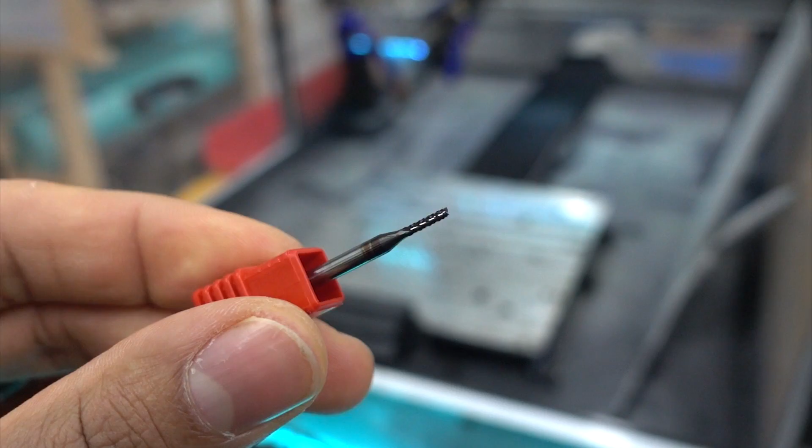Today we're making custom top plates for our magnetic case wallet, as well as engraving a custom pattern on the front plate with a 1/16 inch CVD diamond coated end mill. Let's get started in Fusion.

Okay, the next part we're going to be making for our case wallet is this top plate here, which your cards and cash go under. It's held together with these two binding posts. And to cut this out, we're going to be using three different operations.

We're going to be using 2D Pocket to cut out these small features in here. We're going to be using drill bore to cut out the holes for the binding posts. And we're going to be using 2D Contour to cut out the outer edges, as well as put on the chamfer on the outside, as well as in this 2D Pocket. So we're going to move up here to our palette.

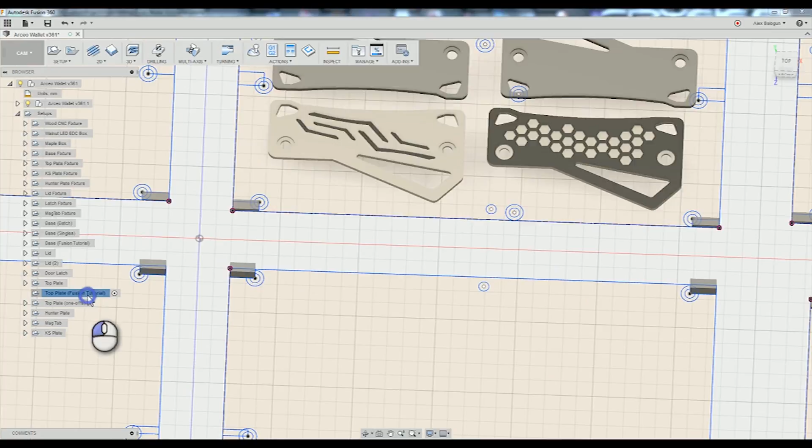So these two plates are what we're going to be doing the CAM for today. These patterns were just overlaid on top of the existing plate. So to get these patterns on, I didn't use Fusion. You can use any other vector program. I use Illustrator specifically. You can upload any type of DXF or SolidWorks file,

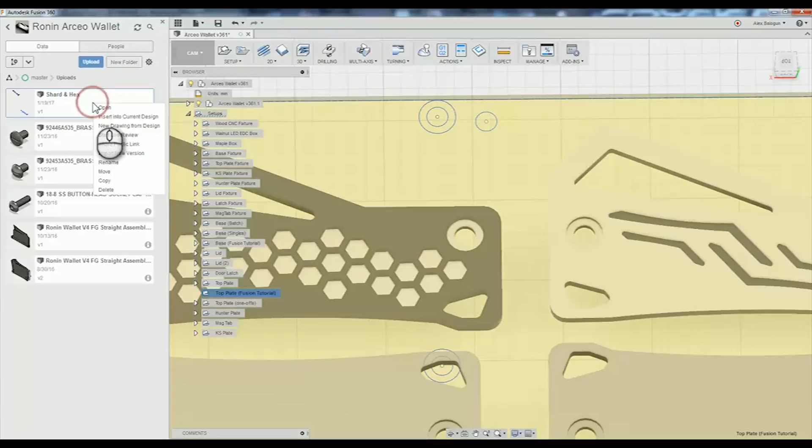and once it's uploaded, you just right click and you can insert into current design, and that will overlay the sketch of the file you uploaded, and you can position that sketch and align it with the geometry of the plate or whatever you want to do the engraving on. So that's how I got these patterns into Fusion.

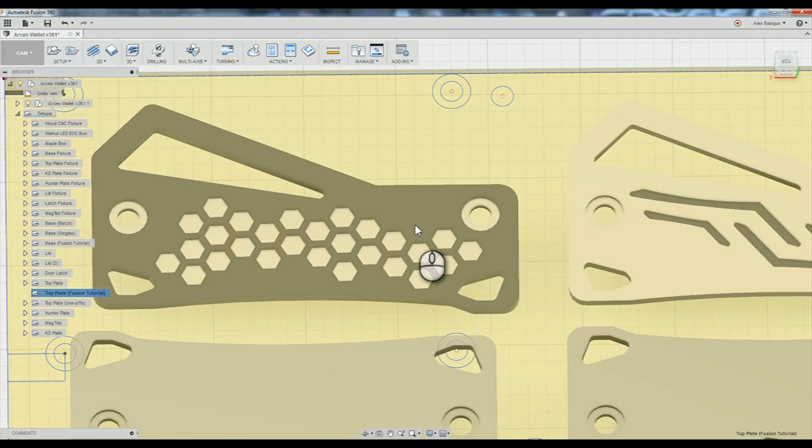Okay, so we have two different patterns we're going to be engraving first. The one on the left, I'll call the hex, and the one on the right, I'll call the shard. They're both going to be using 2D Pocket with a 1/16 inch tool. So let's get started and select the setup. We're going to go to 2D Pocket, and our tool selection is going to be this 1/16 inch CVD diamond coated end mill.

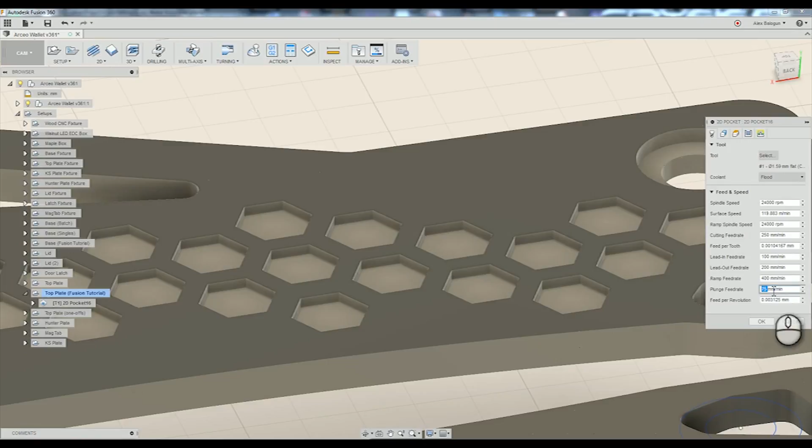Because the depth here is about 1 millimeter, which is a significant fraction of the tool diameter, we're going to go pretty easy on the cutting feed rate. So our cutting feed rate, 250 millimeters per minute. Our lead in 100, lead out 200, and our ramp, because in 2D Pockets you're going to use a helix to bore into the material, your ramp is what will determine your entry into the material rather than your plunge. So your plunge rate is fairly superfluous in this operation.

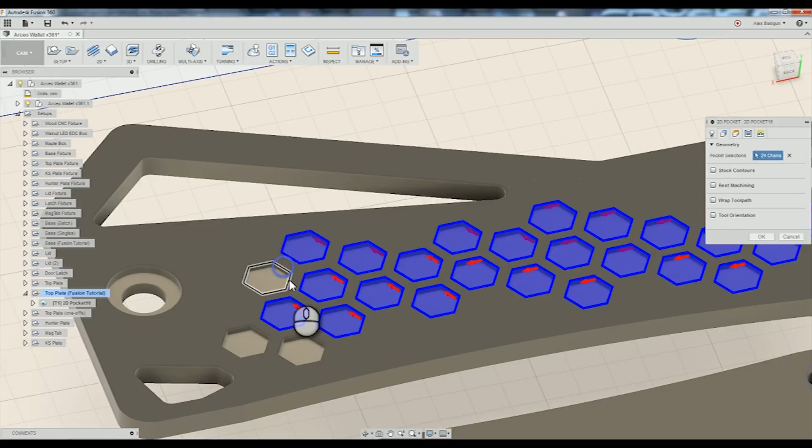So now we're going to start selecting our geometry. We're going to select just the top contours in each one of these hexes. And you'll notice that the red arrow is on the inside of these hexes, so the pocket is bounded on the outside by the blue line.

So now we're going to click over to our heights tab, and we're going to set our clearance height 10 millimeters above our retract height. That's fine. Our retract height, we want this to be pretty shallow because there's a lot of hexes and we don't want to waste a lot of time in Z-axis movement, so I'll reduce that to 3 millimeters. Our feed height can be nice and low, 1 millimeter. Our top height will just be our stock top.

And our bottom height, I like having this at stock top, and then I put in a negative offset. So because I know that I want about a 1 millimeter depth into the face of the material, I'm going to put a -1 here.

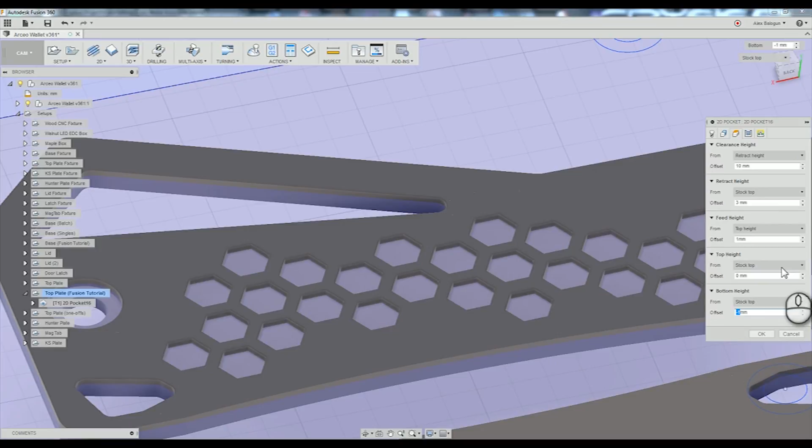Next is our passes tab. So our maximum step over, I want this to be about half the diameter of the end mill, just to keep it nice and safe so we don't get any tool breaks. So I'm going to put in 0.8 millimeters for the maximum step over, and I don't need to mess with the stock to leave. The model is pretty much fine the way it is. I'm also going to turn on smoothing. That'll reduce some of our G-code overhead.

Next is our linking tab. We're going to set some really nice, small, shallow lead-ins because the features are so small. So we're going to put in 0.2 millimeters for our lead-in, as well as 0.2 millimeters for our linear lead-in distance.

Now our helix, we want our ramp diameter to be fairly small, so 1.5 millimeters works. That'll give us a nice small helix that won't impact the outside edge. And the ramp clearance height, we can reduce this to 0.5 millimeters.

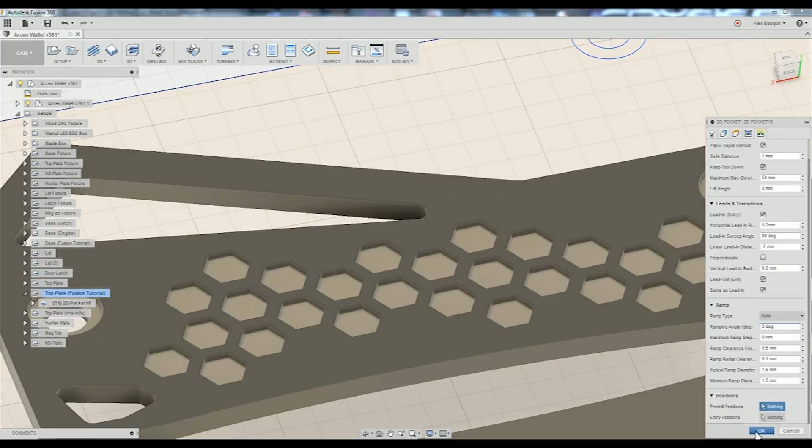And our ramp radial clearance, just to make sure we're not impacting that outer edge, put that to 0.1. And we'll increase our ramp angle a little bit to 3 degrees. Okay, we're going to hit OK and generate that.

Okay, so this is our toolpath here. So we're starting off by boring right into the center, and then it moves over in 0.8 millimeter increments. Now that we have a good look at these toolpaths here, I'll also explain a little bit why I chose 2D Pocket instead of something like Adaptive.

So the great thing about Fusion, especially if you're new to CAM, is when you hover over the toolpath or the operation type, it will give you a nice little tooltip that explains it. So here in 2D Pocket it says it creates a roughing operation that uses toolpaths parallel to selected geometry.

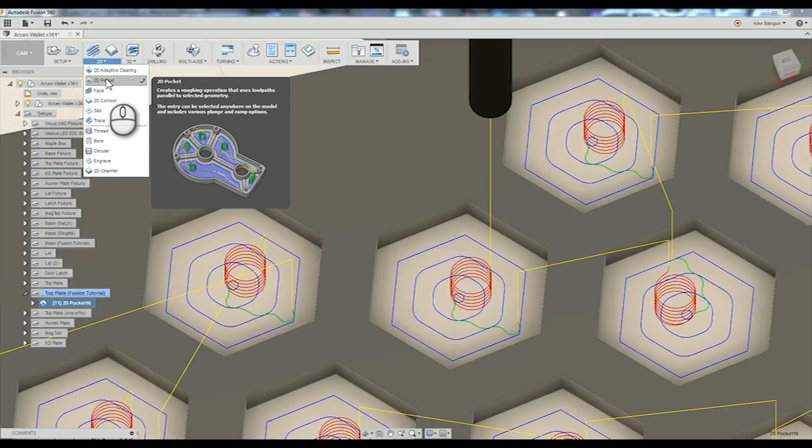So because this geometry is already in the shape of a hexagon, that means my entire toolpath will follow that entire contour and just keep doing step overs until it reaches the outside. So this is really a roughing and finishing strategy in one, depending on your cutting speed. Whereas if you use a 2D adaptive or a 3D adaptive,

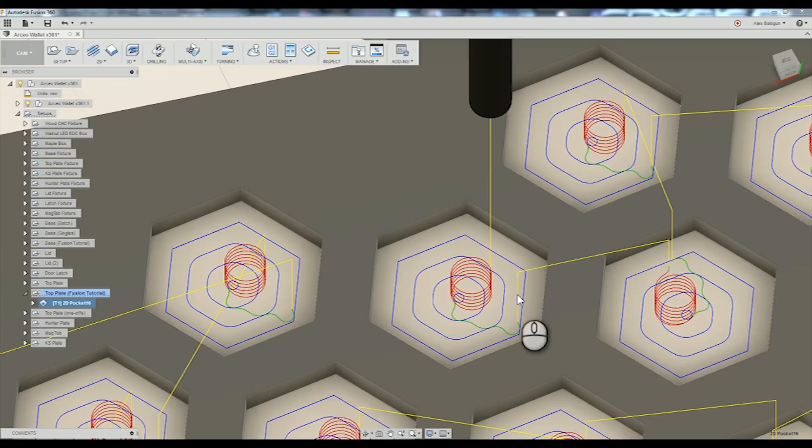the CAM will want to create trochoidal milling paths, which if you have a machine that isn't very rigid, or if you don't have a commercial CNC machine like I do, you're not going to want to mess with extra finishing passes and extra roughing passes when it's not really necessary.

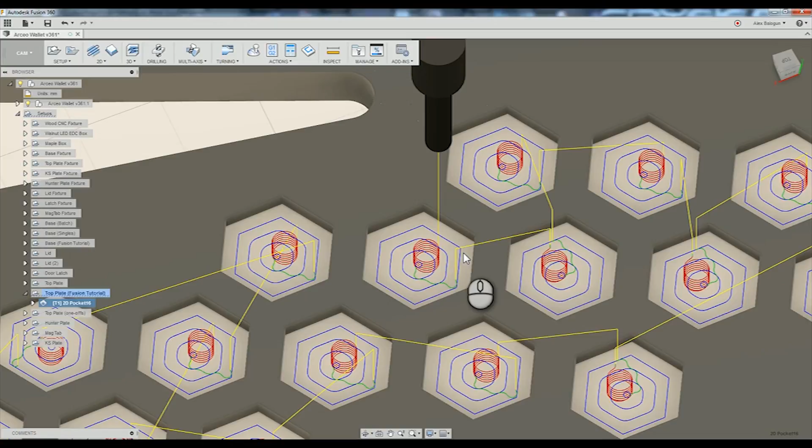So by using 2D Pocket, it will be a little bit slower than a trochoidal milling path, but you'll get a very nice sharp cut on the outside when the operation is finished. Okay, for our next operation, we're going to be doing a 2D Pocket to cut out these small features in here for the shard plate.

Now there's a trick in Fusion that you can use to quickly duplicate a toolpath that you know is going to be fairly similar to the one you previously did, instead of starting from scratch again. So I'm going to right click on the operation we just did, go down and hit duplicate, and that will make a second copy of that same toolpath that we can go in and edit now. So all of our cutting speeds and feeds are the same.

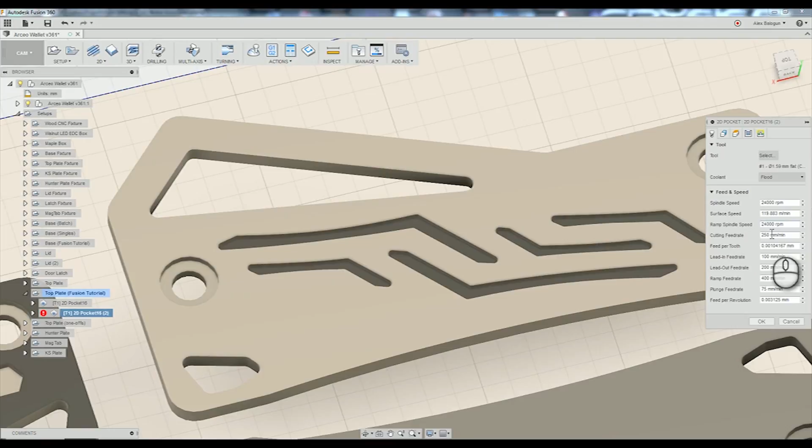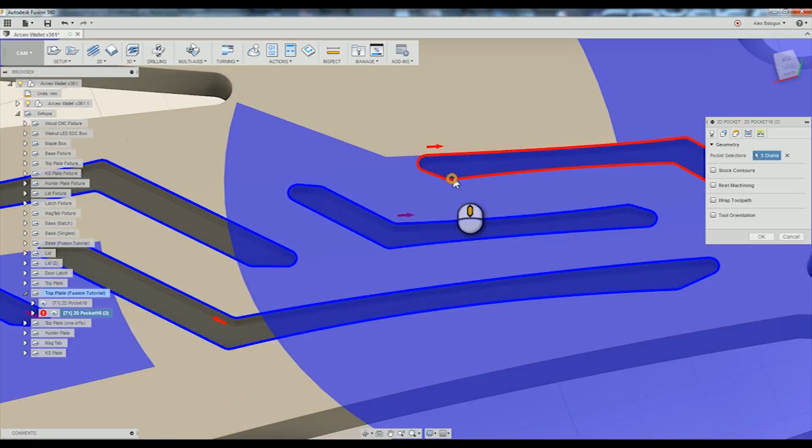I'm going to move over to the Geometry tab and just clear all of those pockets from before and start selecting our new geometry. So I'm just clicking the top of the contour at the top of the stock in each pocket. Because we want to make sure we're doing the inside, I'm going to click these red arrows and make sure everything is on the inside.

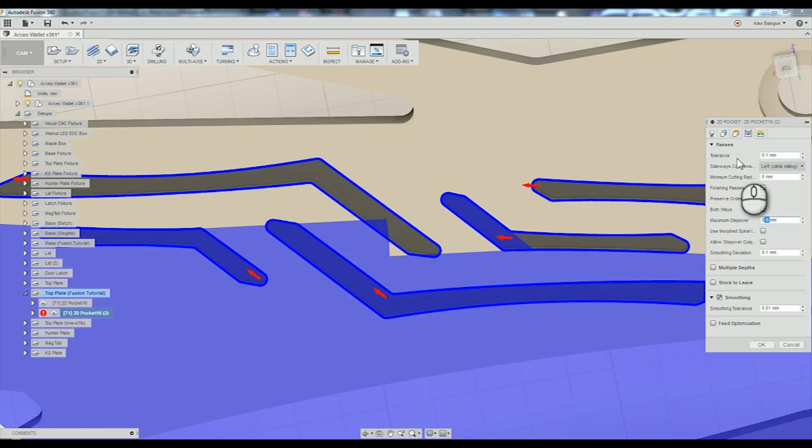Now in our passes tab, everything is basically the same. We're still going to want that 0.8 millimeter step over. Now in our linking tab, we're going to want our entry helix to be a little bit smaller because these features are quite thin. So in helical ramp diameter, we're going to change that to 0.5 millimeters. So that's just going to basically make this the absolute minimum diameter helix we can do for our entry into the material.

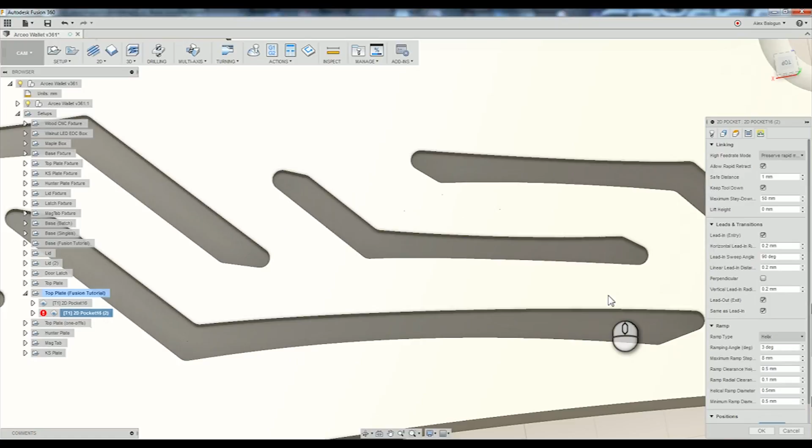Now we're going to go back to our passes tab and we're going to set some stock to leave here. Set our axial stock to leave to 0 and set our radial stock to leave to negative 0.3, just to make sure that because these features are so thin, we're getting enough space. We're also going to turn on feed optimization.

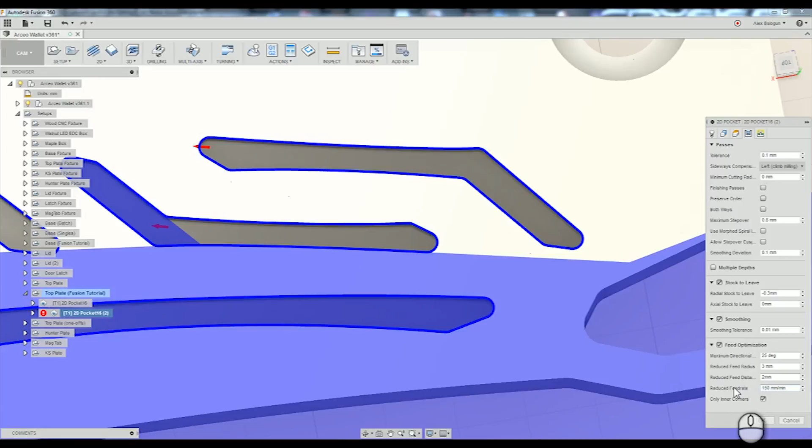And we want our reduced feed radius to be larger than the largest radius in our feature. So if we set this to 3 millimeters, that should easily cover all of the corners that the tool is going to be moving into. Our reduced feed distance, we're going to set this to 2 millimeters. And our reduced feed rate, we're going to set that to 150. And we're going to turn off only inner corners. Okay, let's hit OK to generate that.

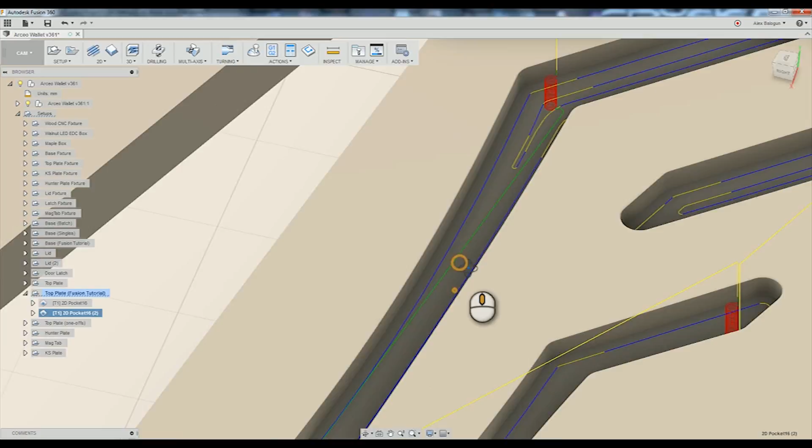Okay, now here we see this green line in here, which is essentially a rapid along the path of the feature that doesn't elevate above the material. And we can see that this line comes kind of close to this outer toolpath. So that makes me a bit nervous.

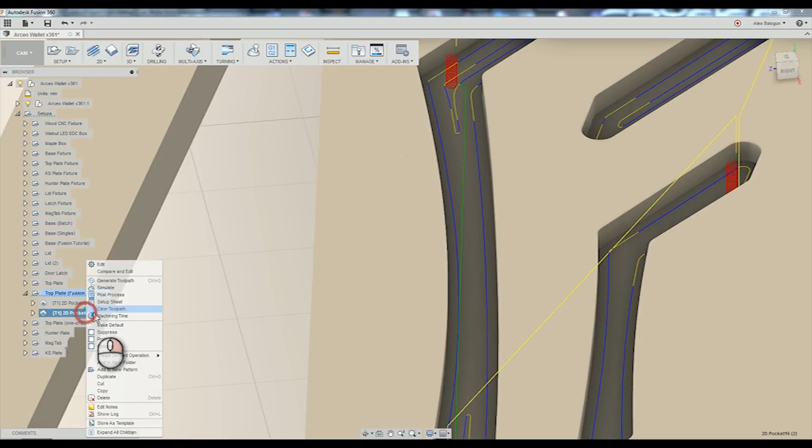So we're going to go back into the operation, go to our linking tab, and unselect Keep Tool Down, and hit OK. So now instead of moving that rapid along the inside of the feature, it's gone back up to the feed height.

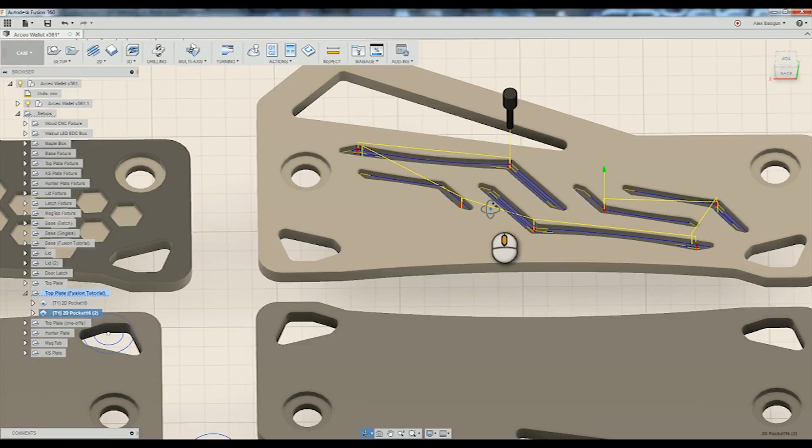Okay, next we're going to move to our bore for our binding posts. So we're going to click Drill, select a 1/8 diameter tool, and start setting some speeds and feeds. So we're going to max out our RPM at 24,000. Our cutting feed rate is going to be 800.

Lead in and lead out doesn't really matter for this toolpath because it's ramping in. Our ramp feed rate, we're going to set that to 600. Okay, let's start selecting geometry. So now we're going to start off with these inner hole faces.

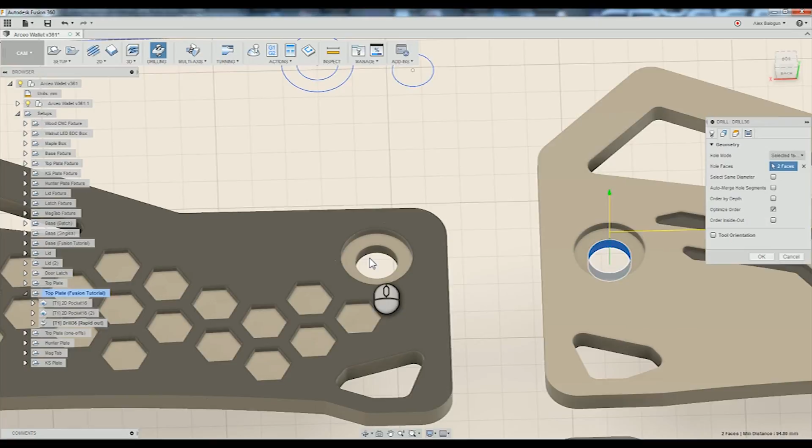Whenever you're doing a counterbore, it's best to do the inner face first, in my opinion. It makes the cutting of the counterbore a little bit easier and faster. Okay, here in our clearance tab, our clearance height's 10 millimeters, that's fine. Retract, that's fine too. Our feed height, we want that fairly close to the material to save time. Set that to 1 millimeter.

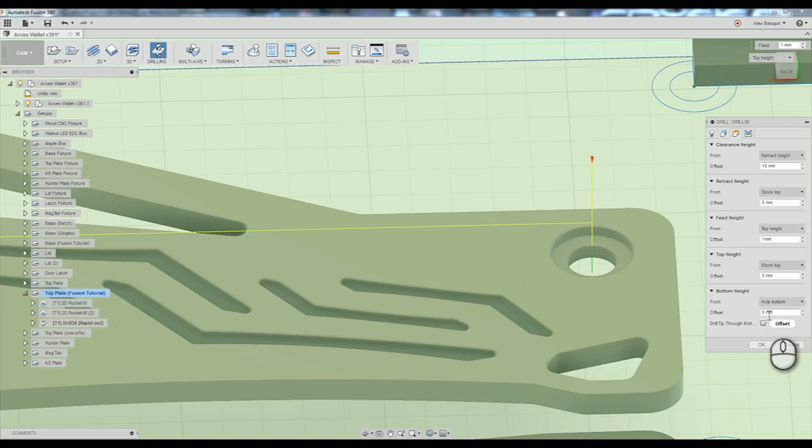Our top height, because this is recessed into the stock, we're going to make sure our stock top is selected because we don't want it just doing a rapid right into the top of the material. And for bottom height, we're going to leave it on hole bottom and then just put a -2 to make sure we get a nice edge finish on the bottom hole there.

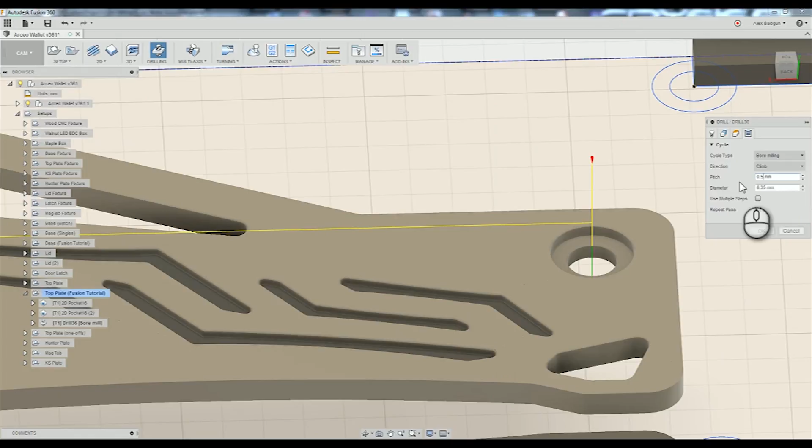Our cycle type is going to be bore milling, and again, just like your operations in Fusion, just by hovering over it, you're going to see a tooltip that will describe each operation. We're going to set our pitch to 0.5 millimeter and our diameter to 6.35 millimeters. Hit OK.

Now for our next operation, we're going to do the same trick we did before, and we're going to duplicate this operation. We're going to move in and edit, go to our geometry tab, clear our previous geometry, and select new hole faces.

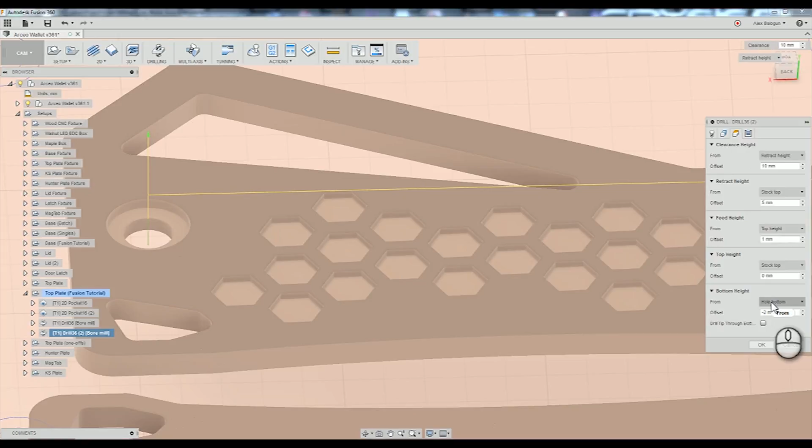Now we're going to change our clearances. Instead of hole bottom for our bottom height, we're going to have hole top. And then our offset is just going to be -1.6, which is our depth from the top of the stock. We're going to keep our pitch the same and change our diameter to 11.3 millimeters, which is the outer diameter of the head of the binding post, and hit OK.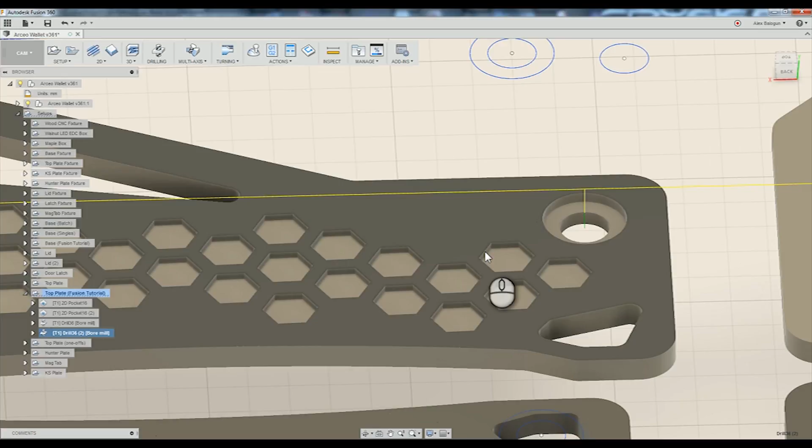Okay, now our next operation is going to be another 2D pocket for these large pockets in here. So we're going to select 2D pocket. Our endmill is already selected. Our cutting feed rate, we're going to reduce this a little bit to 600 millimeters per minute. And change our lead-ins to something nice and easy. 100 for lead-in and lead-out.

Our ramp, because we're going to be doing a helical bore into the stock, we're going to keep this pretty high at 1000. Now we're going to start selecting our pockets. So we're just selecting the top contour in each pocket.

So we're going to move over to our heights tab. Our clearance and retract are good. Our feed height, to save time again, set that to 1 millimeter above the top height. And our bottom height, we don't want selected contours. We want this going all the way through the material, so we're going to hit stock bottom, and our offset will be -2 millimeters to make sure we're going all the way through to get that nice edge finish.

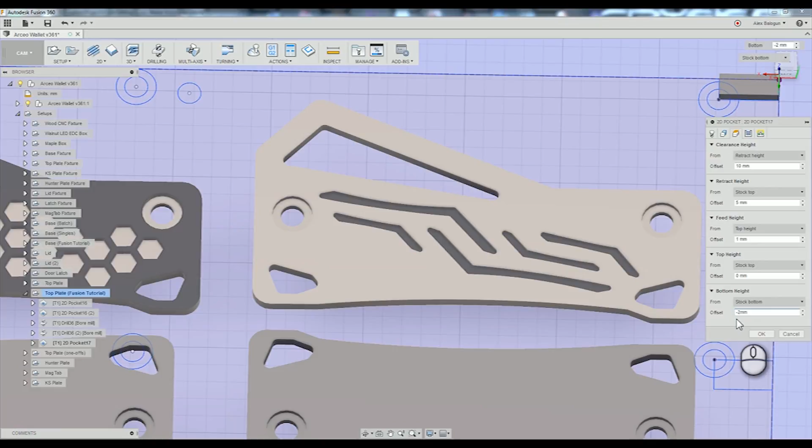Okay, next we're going to go into our passes tab. And before I mention, one of the great things about 2D Pocket is that you can combine your roughing and finishing passes in one operation. So we're going to start off with our roughing section. Our maximum stepover, we're going to make this fairly aggressive at 2.5 millimeters, which is a fairly significant fraction of our tool diameter.

We're going to have some radial stock to leave. Set this to -0.2. That's just based on experience, based on how many times I've run this operation. And we're going to turn on smoothing.

Now we want to do a finishing pass on the outside to make sure we get a really good edge finish there, and make sure our chamfers for our next operation will be nice and accurate. So we're going to turn on finishing passes. We're just going to use one finishing pass, and our step over, I'm going to set this to a nice even number, like 0.5 millimeter. Our finish feed rate, we're going to lower this down to 200 millimeters per minute.

And this basically means that it's going to look at the outer contour that you've selected, and it will end the last roughing pass 0.5 millimeters away from that edge, and then for that last finishing pass, it will take off that last 0.5 millimeter, disregarding this maximum step over value.

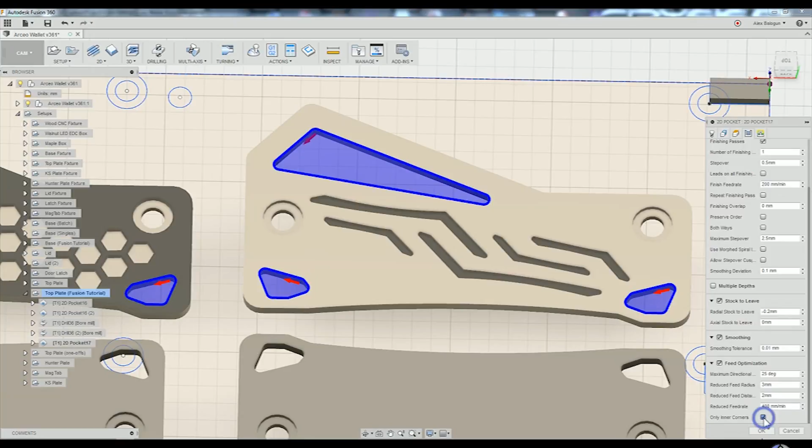So let's move into our linking tab now. Okay, we're going to go to our lead-ins and lead-outs. We want to make sure we're well away from the edge to make sure we don't impact that and mess up our finishing pass. So we're going to set that to 1 millimeter. And for our ramp helix, we want to change this down to 1 millimeter just to make it a little bit faster. This ramp clearance height essentially adds to your feed height. And 3 millimeters is fine for our helix diameters. So we're going to hit OK and generate that.

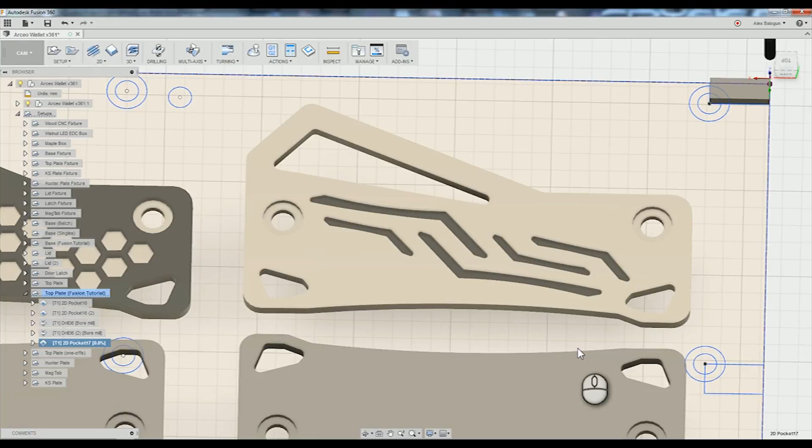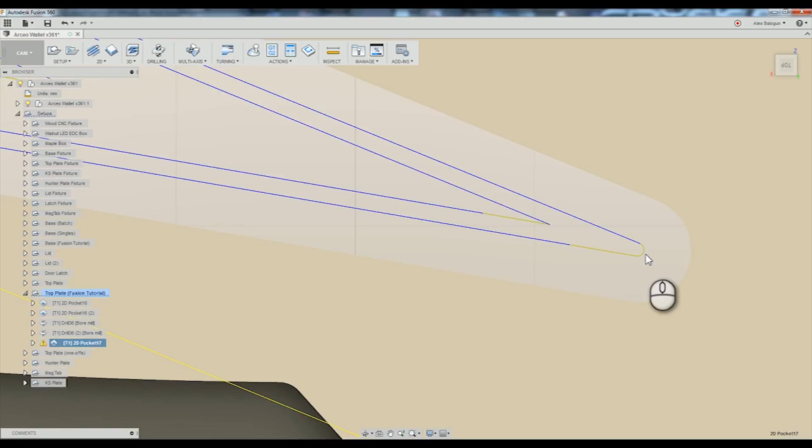So if we hit the top view, that will give us a nice way to see our finishing passes. So we can see here our roughing pass ends 0.5 millimeters away from the outer contour. And on both operations, we have our feed rate optimization slowing into the corners as it turns around.

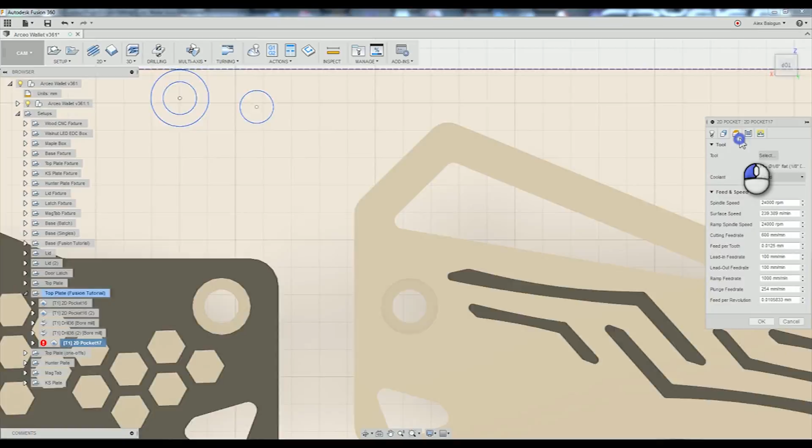Okay, we have a little yellow exclamation mark here. That's lifting feed plane to topmost ramp. That's a fairly common one. It really doesn't actually impact your toolpaths much, but to get rid of that, I'm just going to go into our feed heights and increase this to 2 millimeters. And that should get rid of it fine.

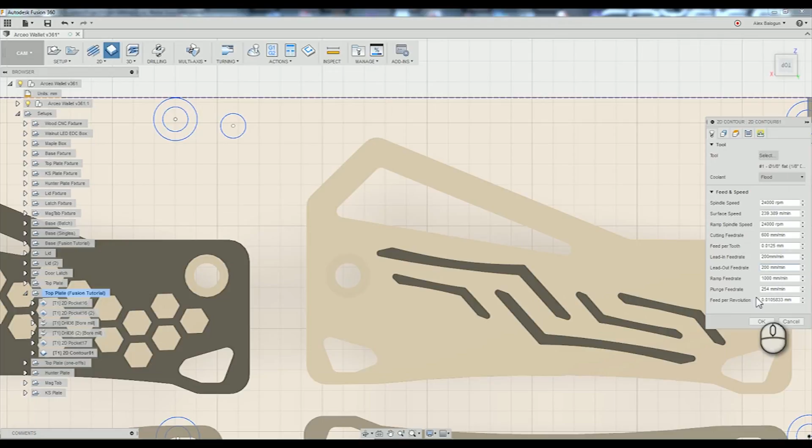Okay, next we're going to cut out the outside of these wallet plates. So we're going to use 2D contour. Our tool's already selected. Our feed rates are going to be fairly quick, 600 for our cutting feed rate, and we'll increase our lead-ins and lead-outs a little bit. Go to your geometry tab and select the outside contours, making sure the red arrow is on the outside.

We're going to turn on tabs. Click at points instead of by distance. And we're going to start clicking where we want our tabs to go. It's easiest to do this in the top view. So we're going to put 3 tabs on each plate to keep that nice and secure.

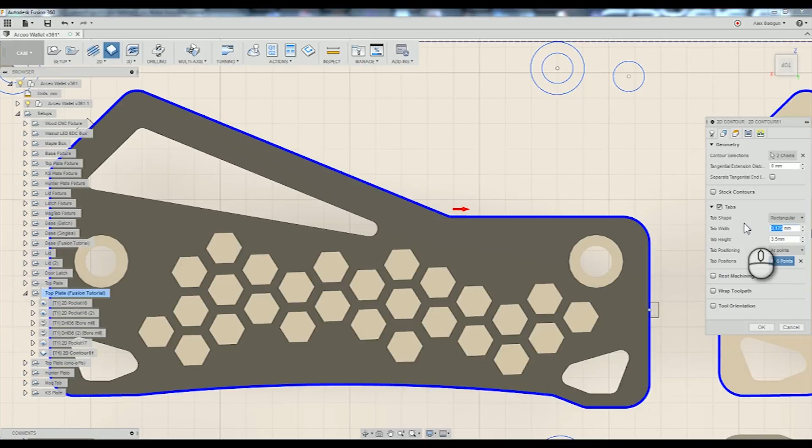Now our tab height, keeping in mind that we're going to be plunging down about 2 millimeters below the stock bottom, so our tab height has to include the stock bottom. So if I take off 2 millimeters from here, that leaves a tab height of about 1.5 millimeters for the G10, which should be fine. For our tab width, we'll just leave that at around 3 millimeters. That should be sufficient.

Next, let's move into our heights tab. Our retract and clearances are okay. Our feed height can be 1 millimeter. And our bottom height, stock bottom, -2 millimeters. Let's move into our passes tab. Off the bat, I'm going to turn on smoothing. Turn on feed optimization.

A reduce feed radius. We want to slow down on these very large radii corners, so I'm just going to set this to an arbitrarily high value of 10 millimeters. And a reduce feed rate distance to 3 millimeters, which is basically the distance that it will slow the feed rate down before it hits the start of the radius. Turn off only inner corners and reduce this to 300 from 600.

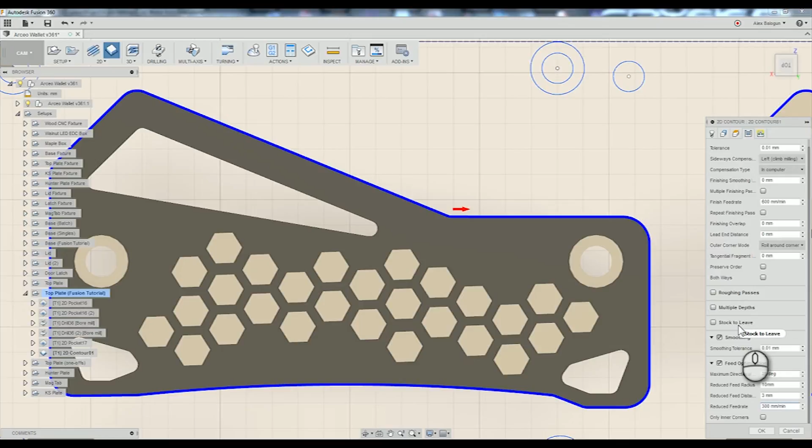We're just going to be cutting this in one depth of cut. We're not going to be taking any multiple passes. So let's move over to our linking tab now.

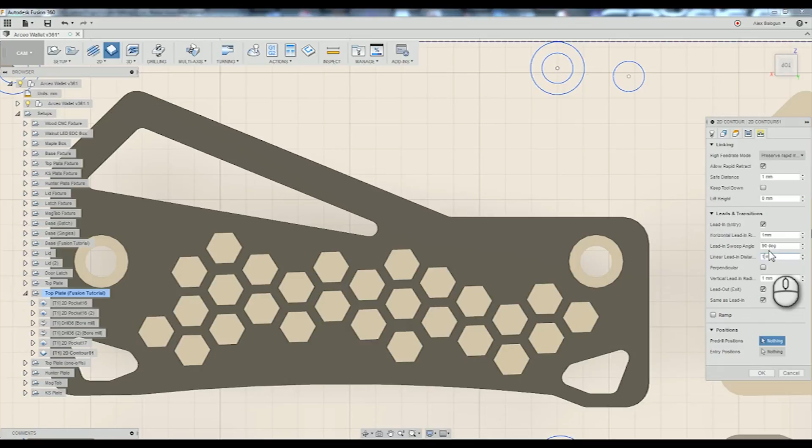We're going to set some fairly easy, shallow lead-ins and lead-outs. So in case there's any deflection while we're entering the cut, it will enter at a fairly nice shallow angle. So we're going to set that to 45 degrees.

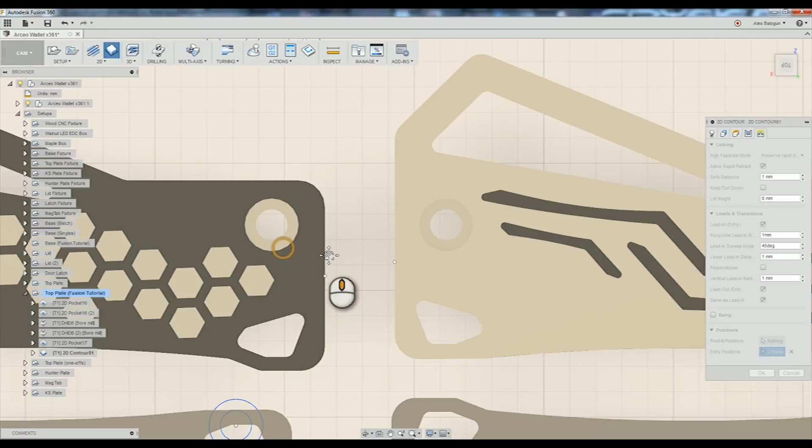Now for our entry positions, I like starting the lead-ins and lead-outs over top the tabs, because I'm going to be grinding those tabs off in case there's any type of tool deflection as I'm entering the stock. It'll just get ground off when I take the tabs off at the end of the operations. Let me hit OK to generate that. Okay, so here are our two 2D contour cuts.

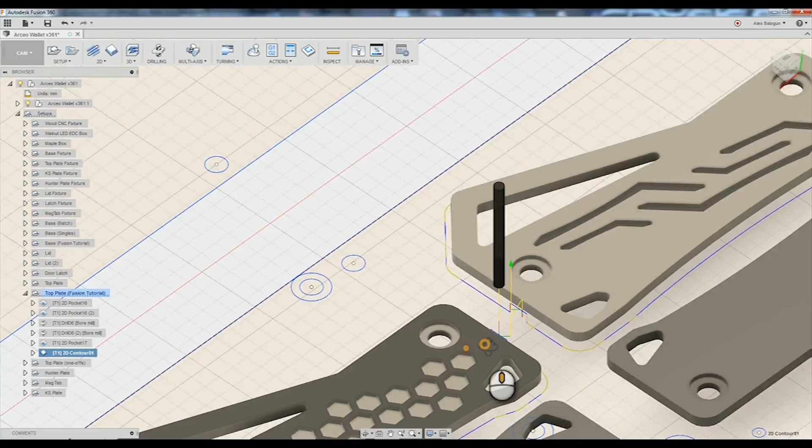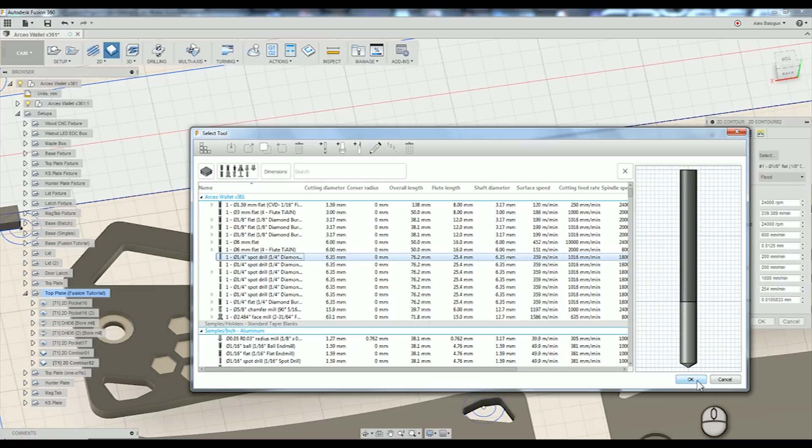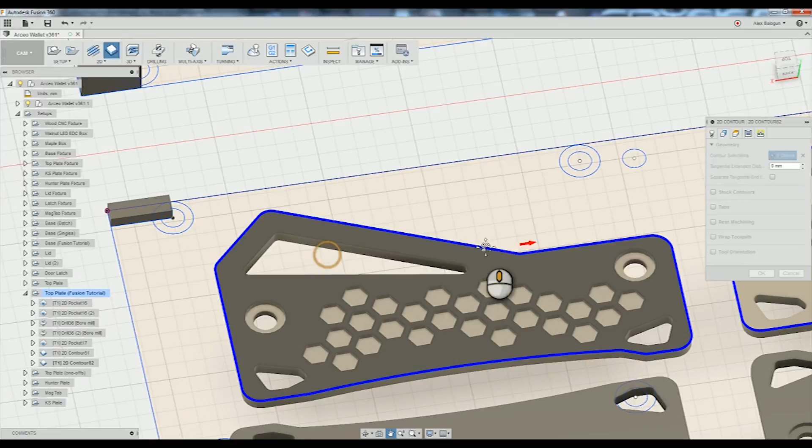Our last operation is going to be a chamfer. So we're going to go to 2D contour again, and we're going to select our spot drill, which is essentially just a diamond coated drill point burr end mill. We're going to move that to our maximum RPM. Cutting feed rate 600, same as our contour. And we're going to start selecting our outer geometries, as well as our inner geometry.

Our heights tab can all stay as default. Because the chamfer is happening right on top of that contour, we can leave our bottom height at selected contour. Moving over to our passes tab, our chamfer width is going to be about 1.4 millimeters, and our chamfer tip offset is going to be 0.5 millimeters, just in case there's any deflection. We're going to also turn on smoothing.

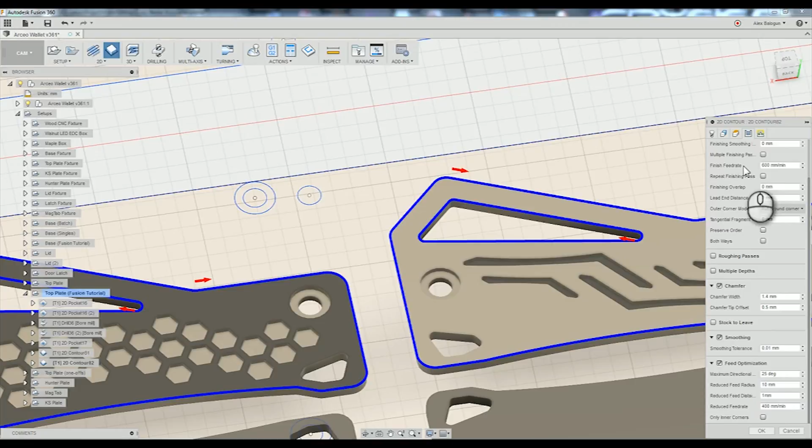I'm also going to turn on feed optimization just to make sure those outer radiuses are nice and accurate. So we're going to set that to 10 millimeters and 1 millimeter. Slowing that down to 400 from 600, turning off in inner corners. Moving over to our linking tab. I'm going to set this to a fairly high value, 3 millimeters, to give it a lot of space to lead in.

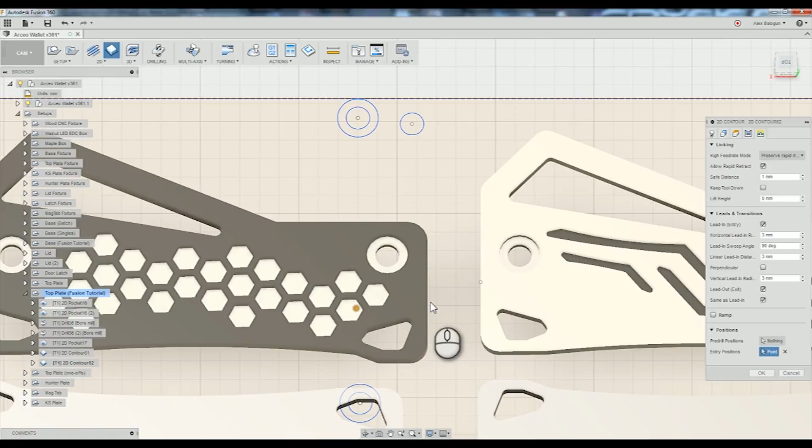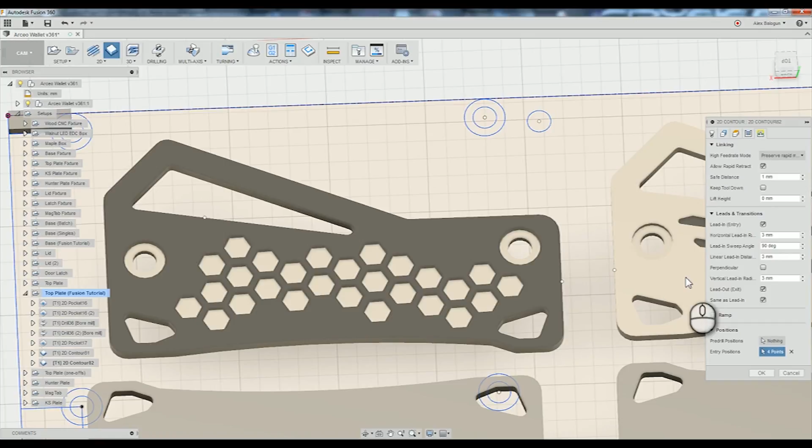And our entry positions, just like our previous 2D contour, I like to start the entry positions right over top of our tabs. And for these pockets, I want to start our entry position right in the middle of the widest part of the contour to make sure that large 1/4 inch end mill doesn't accidentally bump into any of the narrow features. We're going to hit OK to generate that.

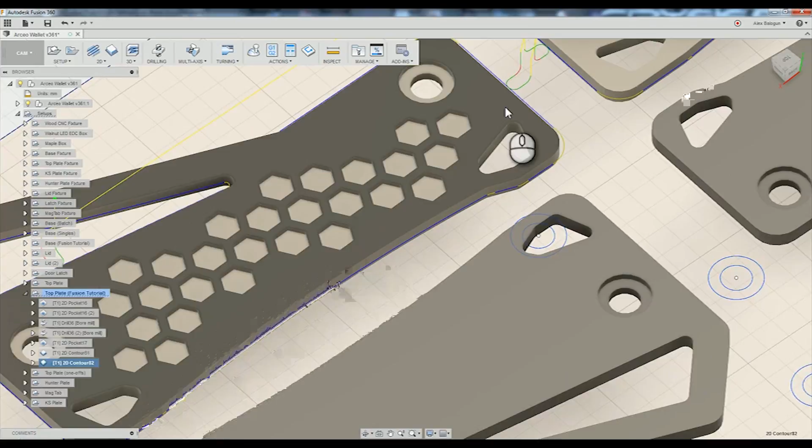Okay, some things I'm going to change. I'm going to reduce that lead-in distance a little bit. Okay, there we have it. So that's all of the operations for our Arceo wallet top plate.

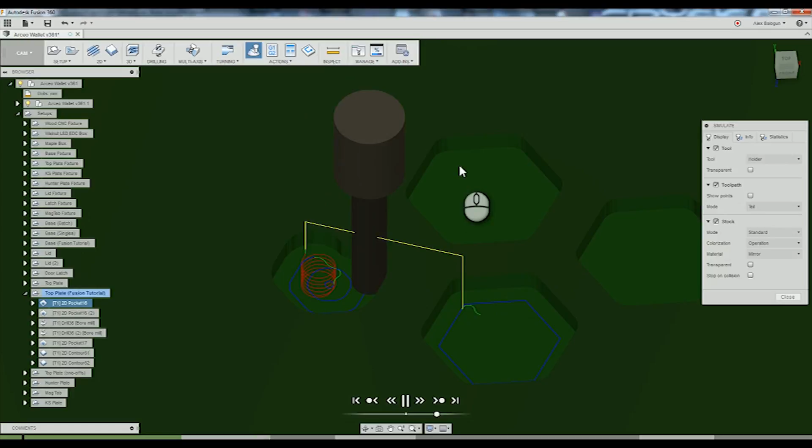Just to make sure that we haven't done anything crazy, we're going to simulate that entire thing. Turn on stock, and we're going to use tail. Flip that around to how you're going to see it in the CNC machine. So here we have those hexes being cut out. You can see the step over happen, and you can see that the inner radius of each of the hexes is the same radius as the tool diameter.

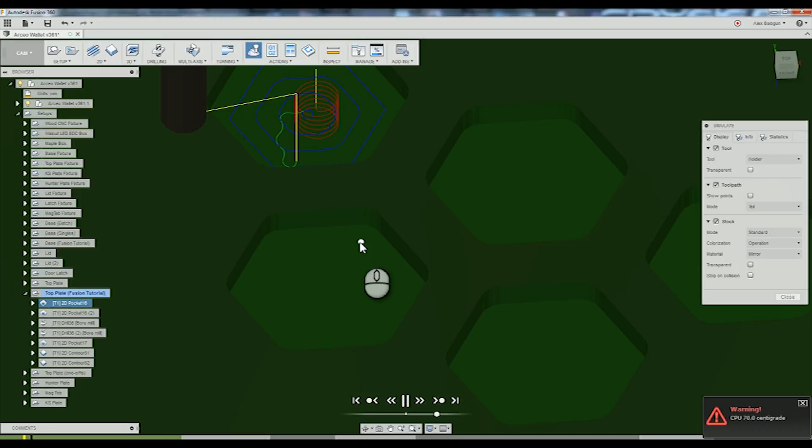In the model, if you just leave the corners nice and sharp, you don't actually have to go through all the trouble of adding a fillet to each one of those features in the model, which can take forever. You can just leave the corners sharp. The CAM will take care of the rest, and what you'll end up having is a corner that will have the same radius as the tool diameter you're using. We're just going to speed through this.

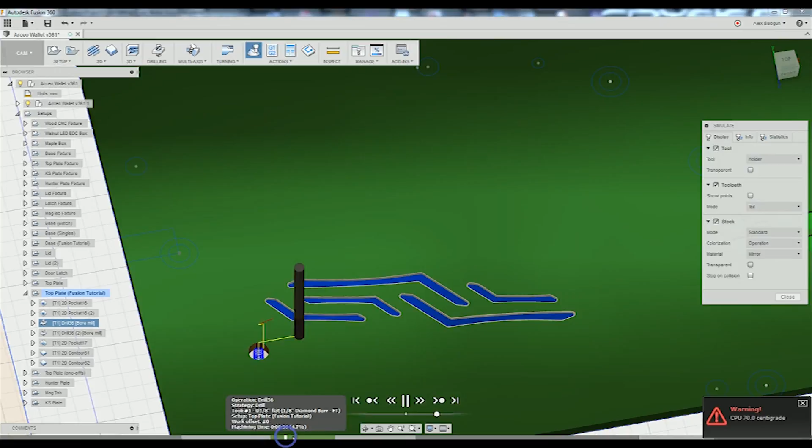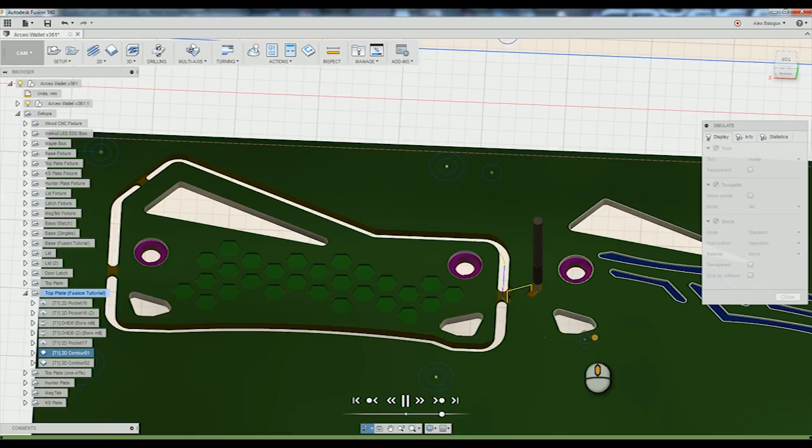So we can see it here taking that last finishing pass off the edge, just in case there's any tool deflection. So if you really tweak your CAM and have good finishing passes, there's no reason why a DIY machine like an OpenBuilds C-Beam can't do some fairly nice part finishes. Okay, I think that's good enough for the simulation. We've seen one get fully cut out.

Thanks a lot for watching. I hope you're able to learn something about Fusion 360 CAM and about the 2D pockets and the advantages they might have over adaptive. Next, we're going to move right into the CNC cutting.